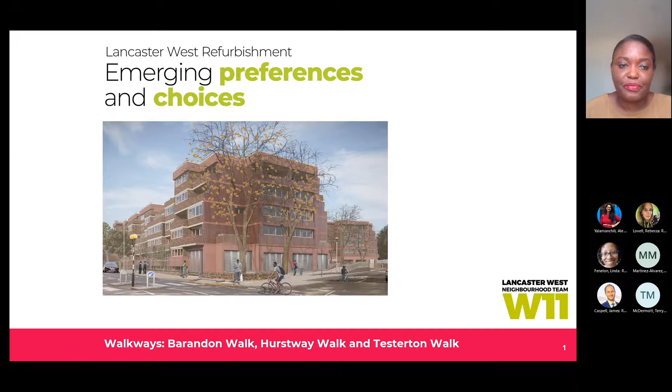I'm going to start off with a quick introduction of the Lancaster West team working on the external refurbishment of your blocks, that's the outside of the buildings and the communal spaces. Many of you will have met James Caspell, Lancaster West Estate Neighbourhood Director, and also here today is Andros Luizo, Head of Refurbishment Design and Delivery. Myself, Bunmi Shekoni, Senior Project Manager, Terry McDermott, M&E Project Manager, Maria Martinez, Refurbishment Project Support Officer, Aleke Yalamanchili, Assistant Project Manager, as well as Janet Hall, the Heat Network Engagement Manager.

In terms of the agenda, the meeting will last about an hour. I've done the introduction. James Caspell will give a brief introduction and an update on the refurbishment site-wide, as well as the Walkways co-design timeline. We'll run through the feedback from the initial design ideas phase and how that's informed the development of the technical design. We'll look at the improvement works to your homes, both the essential fire safety works and the thermal improvement works, which cover the sprinklers, the ventilation system, the windows, insulation strategies, as well as the lighting pilot and the main refurb pilot.

In addition to that, we'll be talking about the improvement works to the exterior of your blocks, the roofs, the AOV improvement works, the communal areas, the refuse and waste management strategy, and how we're going to be maximizing fire safety, looking at the fire strategy for the 3 blocks. We will conclude with next steps for the refurbishment and how you can fill out the Emerging Preferences and Choices survey for your feedback. So without further ado, I will hand over to Lancaster West Neighbourhood Director James Caspell.

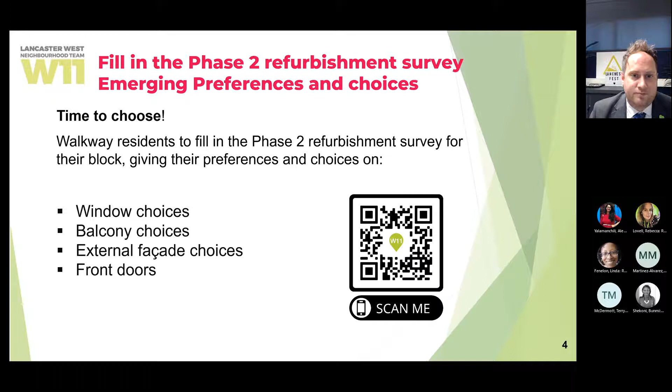In terms of the co-design timeline, it was last spring when we started the first phase, which was capturing the initial design ideas for refurbishment works. At that point, we'd secured grant funding from all levels of government to be able to deliver on the promise of a 21st century model estate. So we asked you for your views on things like different types of wall insulation, different types of glazing and ventilation. We've been working to process that feedback, looking at what is technically feasible and having specific engagement on issues like maximising fire safety and the roof works, which are due to commence in January 2023.

So we're now in the emerging preferences and choices phase. There'll be a range of events and drop-ins, including at the 411 Testerton Walk pilot, as well as our showroom at Unit 29 in Baseline Studios. Through October and November 2022, we're going to be speaking to as many people as we can to capture your views to shape your refurbishment. Next slide, please, Maria.

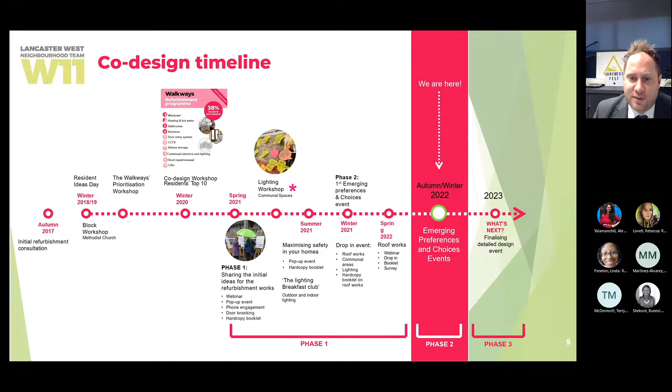In terms of the initial design ideas events that we held last year, you told us a number of things. Nearly 9 out of 10 residents supported triple glazing over any other form, and just over half of all residents prefer aluminium frames. Specifically, we had a lot of verbatim feedback that said people would like aluminium frames very similar to what we've got at the moment, the original Walkways windows, which are in most of the homes today.

But we are going to review that and give you the option to look at other choices as well. So we've used this feedback to decide the best window types available. We've installed them at 411, so you can come along and have a look and a feel in terms of different operating mechanisms and colours. We're aiming through the second phase to have over 50% of all households on the walkways take part in the co-design process. Next slide, please, Maria.

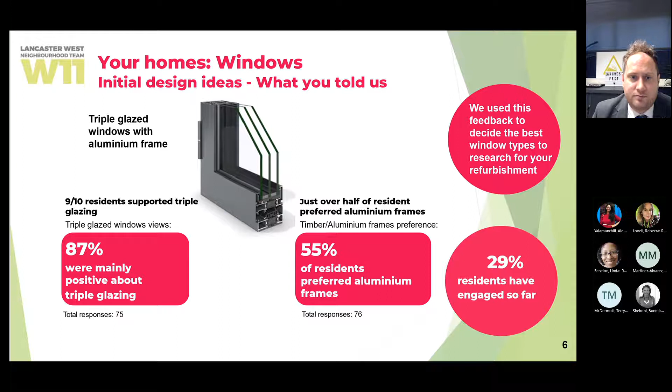So in terms of wall insulation, we presented to you last year options around external wall insulation and internal wall insulation, and since then we've started to explore and are currently confirming what will provide the maximum benefit in terms of energy performance, and at this time especially in terms of reducing your energy bills.

Residents did tell us that they preferred, if anything, external wall insulation. People were open to internal wall insulation, but we had feedback around not removing the footprint of your properties, which internal wall insulation tends to do since it takes up space in your home. Also, external wall insulation is often easier and more robust to fit in a way that lasts, and it gives us the opportunity to improve the visual and texture of the external facade.

What we're going to hear later on is some of the options that will be available, and you can come along to Unit 29 Baseline Studio Showroom to actually see and feel what some of those EWI options look like. We're continuing to look at the different types of insulation, but for now we're asking what your preferences are in terms of the colour and texture available, and whether you'd like to see a minimum or maximum amount, which we'll discuss a little later on.

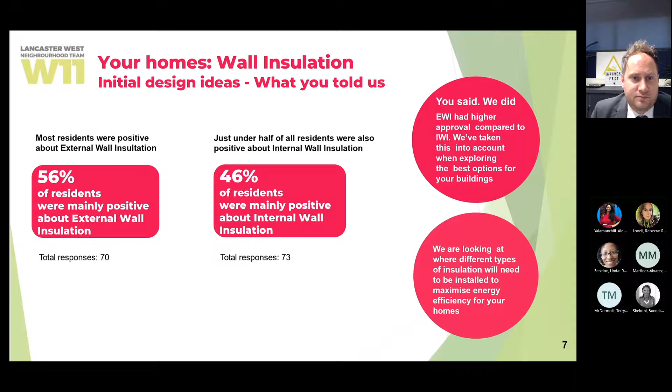At the Maximising Fire Safety drop-in event, which we held a few months ago, we talked about the options to install sprinklers into every home. It's a key part of our fire strategy to install sprinklers in every Walkways property. We're also ensuring that other work we do around external wall insulation and ventilation helps to improve safety in your home, and looking at A1 and A2 non-combustible materials wherever possible, well beyond building regulations.

With regards to sprinklers especially, 7 out of 10 residents were positive about having them installed, but we did have a number of concerns expressed about disruption to the home, impact on ceiling height and so on. So we're going to share with you some of the viable options which will mean those concerns will be mitigated.

Residents are also positive about replacing the windows facing into the atria, the communal spaces, with fire-resistant glazing, which will mean we can eventually do away with the fire curtains, which a lot of people gave us quite strong negative feedback against. We're going to share with you what the options are to improve that as well.

In terms of your communal spaces as well, in summer 2021 we asked what you liked about your communal spaces and what you disliked. People obviously like the wide walkways, the high ceilings, and a sense of privacy from the outside neighbourhood. But there are a lot of dislikes too, around cleanliness and colours, the way the stairwells are configured, the level of noise, security, and a range of other concerns.

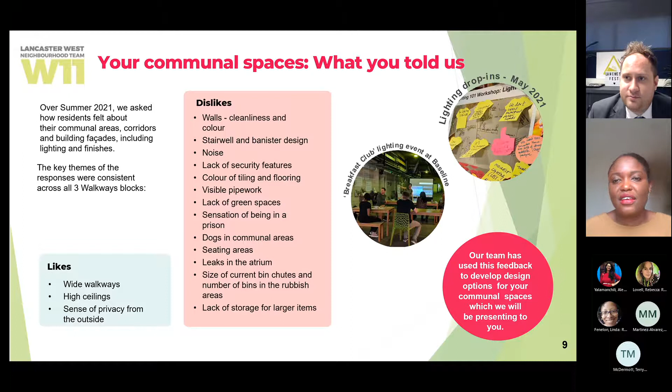We made the decision to accelerate the roof improvement works for the walkways due to funding timescale. The roof improvement works provide an opportunity to improve the look of your blocks, improve thermal performance, fire safety, and of course eliminate long-term issues with leaks and reduce maintenance needs.

The AOV leaks are an issue, particularly in Barandon Walk. The existing AOVs are beyond their usable life and are currently jammed open, and we all know what that means in terms of water coming in, particularly in the winter months.

Phase 2 engagement for the roof works was held in May of this year. Residents were invited to drop in at NKRC. We talked about the AOV and roof light frames, the colour, look and finish. We talked about parapet railings, the works to the terraces, which is the penultimate level, as well as the terrace screens which divide the terrace space, and the pergola structure and material.

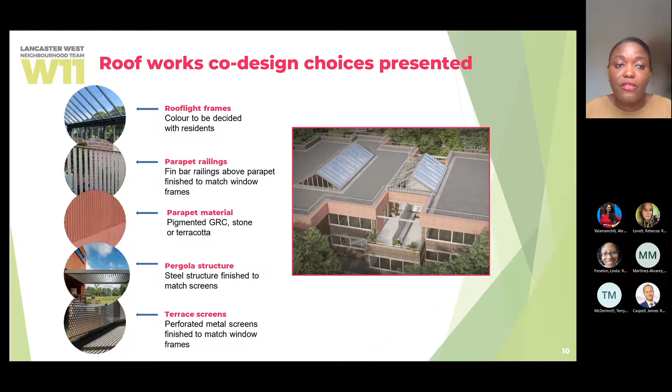So of the 283 eligible properties across all 3 blocks, 81 flats, which is 29% of flats, completed the survey for the roof works. And for the roof railing color, the majority of residents preferred dark grey.

The atrium roof light color, the majority preferred white, which is similar to what's currently there at the moment. For the atrium roof light gable glazing, the clear preference was clear glass as opposed to frosted glass, which provides a clear view of the sky from within the atrium space.

In addition to the thermal improvement of the roof deck and the replacement of the roof lights, the pergola structure and screen on all terraces will be replaced as part of the works. For the pergola, 3 options were presented, and the majority preferred a covered option to provide shelter from the rain and sun, which is quite nice if you're using your terrace space and sitting there enjoying a coffee.

3 options were also presented for the replacement screen, which divides the terrace space, and the majority of residents prefer the diagonal pattern option in a dark grey colour.

So we now have planning permission for the works. We've tendered the project. The tender return date is the 21st of October, which is today, the day of the presentation, and there will be a 2-week evaluation period, which will involve tender scoring with residents.

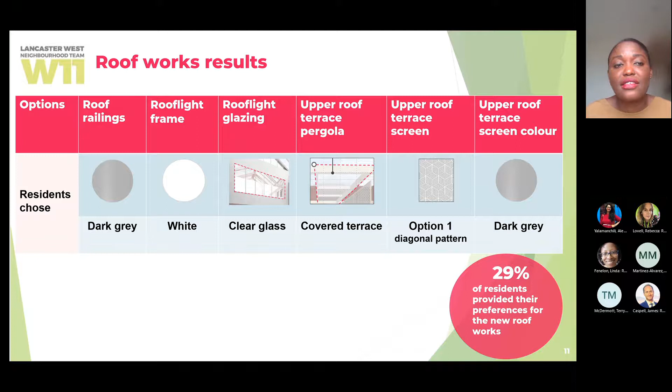Alongside improving fire safety of your homes, a key focus of the refurbishment design for your blocks has been retrofit measures to improve the thermal efficiency and energy performance.

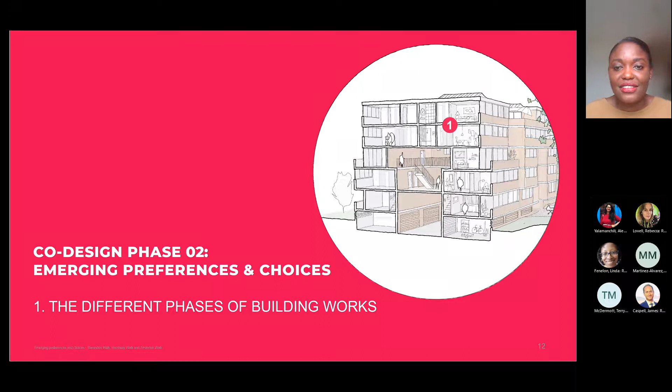Measures the design team have looked at include insulating the roofs, as mentioned earlier with the roof improvement works, and upgrading the roof lights, which will help reduce heat loss and heat gain. The systems under review all use A1 rated non-combustible insulation.

And as I said, it's been fast tracked. We've tendered. We're looking to start the works early next year for the roof works.

The other energy and thermal improvement measure we're looking at for the walkways is the replacement of windows and doors, changing these to airtight triple glazed frames, which offer significant thermal improvement. We know that the replacement of windows and doors is a priority for residents in the walkways, so that's top on our list as well.

There's also the upgrade works to the balcony decks with new drainage, insulation, and rainwater goods, which will reduce heat loss from the internal space below the balconies, and also help resolve the recurring balcony leaks.

Wall insulation is also a key part of the thermal improvement works, improving the thermal envelope either by insulating from within, the internal wall insulation James mentioned earlier, or by wrapping the exterior facades of the blocks with external wall insulation. James is going to go through this in more detail later on in the presentation.

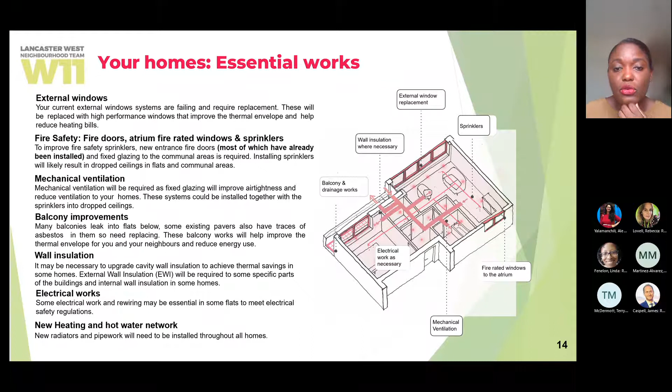In terms of the sprinklers, I mentioned earlier that sprinklers is obviously an essential fire safety work that needs to be carried out. And we've evaluated different ways of installing the sprinklers.

One piece of feedback from the recent fire safety engagement was that residents raised concerns about the dropped ceilings - some residents have tall furniture, so what does a dropped ceiling mean for tall furniture, and also pendant lights? So we've looked at a ceiling mounted option, which is recessed into the dropped ceiling with pipework behind it, and there's also a wall-mounted recessed option where the sprinkler is recessed into a boxing at high level in the rooms.

In terms of the pros and cons, let's look at the ceiling mounted first. For pros, we're going to have concealed fittings, which ensures a discreet and tidy finish, and the sprinklers are located in the center of the room, which maximizes the spread of water if activated - that's better from a fire safety point of view, with good reach to all parts of the room and less open to obstruction.

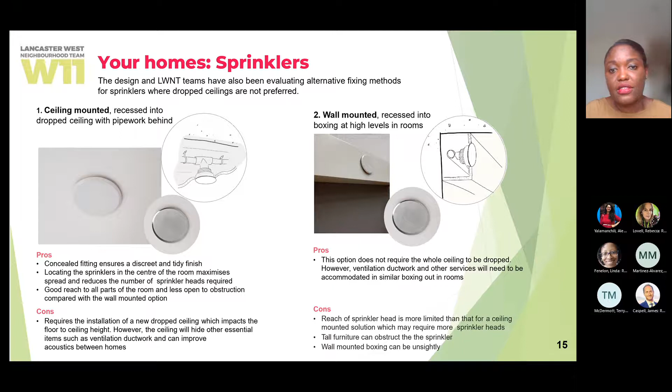I will now hand over to Terry, M&E project manager, who's going to present the mechanical ventilation systems we've explored and how they could be installed in your flats. Thanks, Fumi. So new ceilings in your homes has obviously been a question that everyone's asked about.

As a minimum, the drop ceiling will generally need to be dropped 117.5 millimetres to accommodate sprinklers, lighting and MVHRs. We're looking to minimise the depth of the drop ceiling to ensure the ceiling height remains as generous as possible, and are trialling options in the pilots at Testerton, where we're going to be doing an open day very shortly - so please come down and have a look for yourself.

Additional space will be needed depending on the chosen ventilation - MVHR, ducting and cooling. The following are minimum guides for MVHR. We've done three types on the pilots, shown in the pictures below: plastic ductwork is 137.5 millimetres, metal ductwork - which is our preference because it's fire rated higher than plastic - and MVHR with future proofing for cooling, which requires a deeper depth of 147.5 millimetres.

Both plastic and metal ductwork are safe, however metal ductwork has an additional fire safety benefit as it's an A1 rated non-combustible material. Can you move to the next slide, please, Maria?

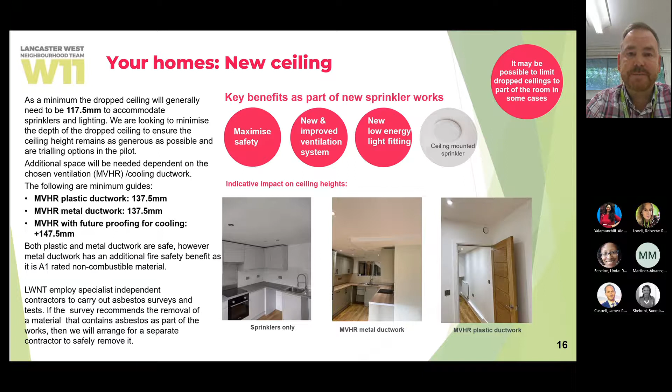So your home's combating overheating. This is where we've engaged and listened to you guys. We know that many of your homes overheat, and we are looking at ways to address this issue. We've monitored a selection of homes throughout the summer, and we are also using computer software tools to develop solutions.

There are a number of ways we can reduce overheating: reducing solar gain by replacing the windows with glass which is high efficiency and reflective. We've also improved the ventilation, which follows into the MVHRs. The design of the new windows aims to maximise natural ventilation in a safe and secure way. The new mechanical ventilation systems will also help by improving the ventilation of homes, as well as bringing fresh air inside.

Adding insulation to walls and roof means heat gains from outside can be reduced. Replacing the existing heating pipework with new insulated pipes will also help to reduce internal heat gains in warm weather. Adding cooling - this is adding mechanical cooling with the MVHR units, which can be added to some of the worst affected homes. As we're installing these, we are future-proofing the mechanical ventilation so that we can add the cooling later on down the line, which is definitely a positive for the estate.

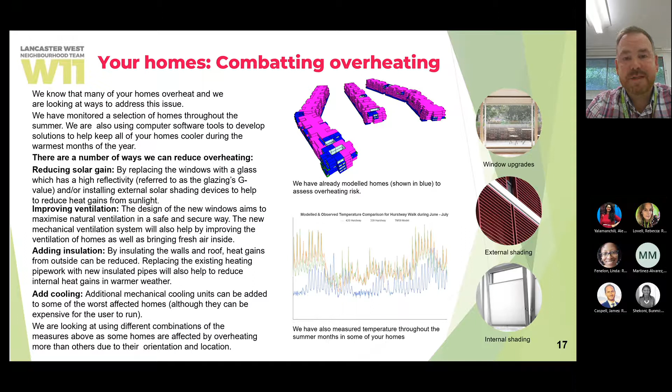So ventilation - keeping your home well ventilated is important to keep the air in your home fresh and healthy by reducing indoor air pollution. The key benefit of the MVHR system is that it recovers heat from stale air from your kitchen and bathroom before it's extracted. This means MVHRs can reduce your fuel bills because it's more efficient.

However, the MVHR kit is larger, which will impact storage space. It also requires ceiling vents in all rooms. In the smaller properties, the 1-bedrooms, we have been able to install the MVHR in the ceilings, so there's less impact. In the larger properties, they would require a store cupboard to go in, but they are hidden and not on show.

So just the pros and cons of MVHR, mechanical ventilation with heat recovery. The pros: it reduces the cost of heating as the kit recovers heat from extracted stale air, improves internal air quality, and reduces pollution by filtering incoming air.

Cons: the kit reduces internal storage space as I've said, and requires regular maintenance - changing the filters. The filters need to be changed twice a year and also cleaned every 3 months, but it's very easy to do. MEV, mechanical extract ventilation, is another pilot that we've done.

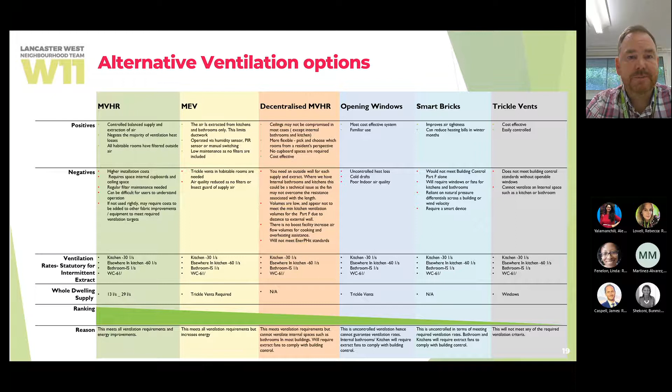Can you move to the next slide, please, Marion? So your home's ventilation - as we've discussed, the MVHR, also MEV and extract fans. As you can see on this slide, the savings across the whole year would be around £240 on your bills for electricity and heating. Obviously, with the current climate, with the electricity and gas issues, that will change over the coming years. But the MVHR will definitely improve the situation for you.

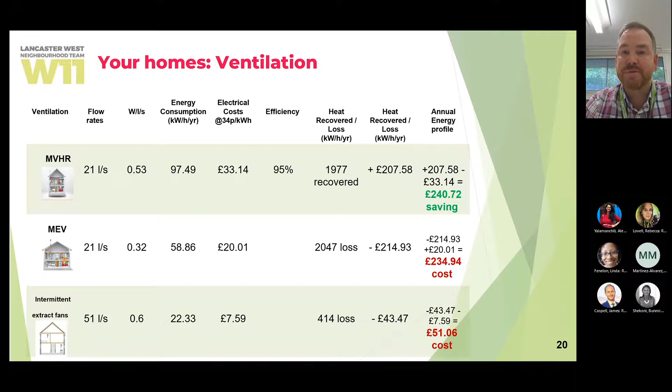Maria, can you move on to the next slide, please? So here's a diagram of the ventilation and the likely locations. We've used the Brink Flair 325 option and the Zehnder Comfoair as well, which are the top models on the market at the moment, and provide the best situations for ourselves and the properties we've got.

The MVHR ventilation machine will need to be located within an existing storage cupboard, like we've said, which means it will reduce overall storage space within your home. Again, that's not on show, but it is tucked away, depending on the size of the unit. Above is the example of MVHR in the Testerton pilot marked in blue. As you can see, it's in one of the storage cupboards - nice and tidy and tucked away. Thank you very much.

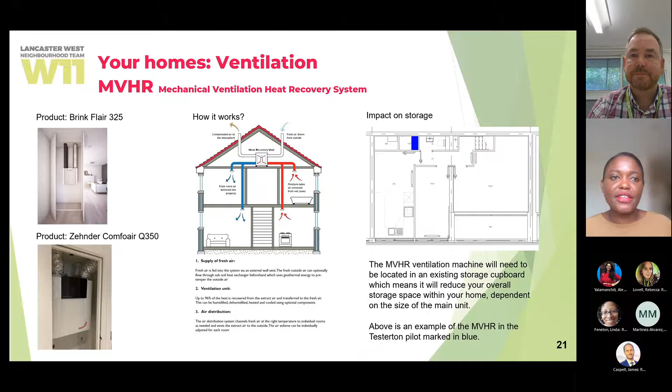So in terms of the windows, we've looked at different options. We've looked at aluminium windows, we've looked at composite windows, following feedback from phase one. We've explored different opening mechanisms: outward opening, inward opening, tilt and turn, slide in, and the different preferences indicated by residents' feedback in phase one.

Obviously, the starting point was the thermal performance, the U value. The lower the U value, the better. So looking at all the different options here, we've got Ideal Combi Velfac for outward opening windows, and then there's Ideal Combi Futura Plus 1 Velfac, as well as Schueco sliding doors.

So yes, in terms of U value, the inward opening tilt and turn Ideal Combi is probably the best, has the best thermal performance, followed by the Velfac 200E outward opening, and then followed by the Futura Plus outward opening.

We've also looked at secure by design. A window is secured by design certified if it meets rigorous standards of enhanced security performance as defined by the police. So obviously, our preference would be to install windows that meet that requirement.

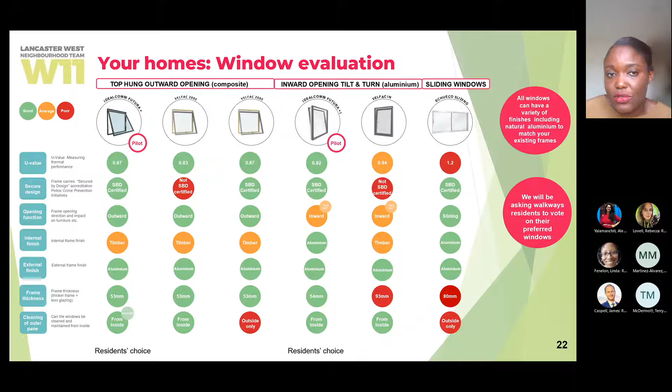So these are the two options. They both have great thermal performance, a low U value, 0.87 and 0.82. They're both secured by design. One is an outward opening reversible window, the other is an inward opening tilt and turn window.

One is fully aluminium, inside and out. The outward opening window, the Ideal Combi, is timber on the inside and aluminium on the outside. They're quite slim and very similar to the existing frame. In fact, we've piloted these windows in Phase 1 testing, so if you'd like to view and test them, we'll be inviting you to come and see the windows.

Both windows can be cleaned by residents from the inside of their flats. We'll be writing to you. I think a letter's already gone out to residents inviting you to 411, and there's also a video invite on the Instagram page.

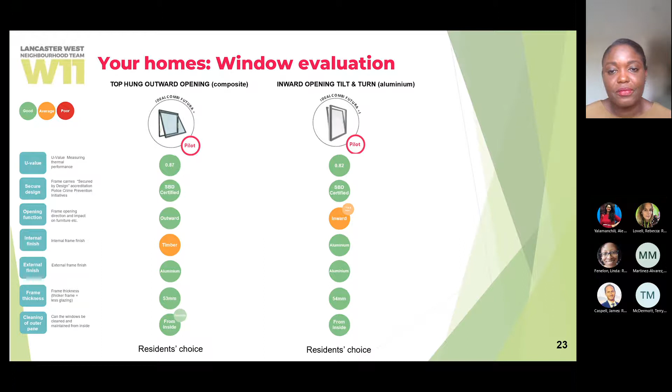Similar to the windows, we've looked at different options for the doors. We've looked at an aluminium framed system, and we've looked at composite, following feedback from phase one. We've looked at the thermal performance, secured by design, and the internal and external finish.

We've piloted the Velfac 200E, the second sliding door on the slide, in Phase 1 testing, so residents can come and view and test it. It's not as great as the Ideal Combi frame when it comes to thermal performance, the U value. Both Ideal Combi and Velfac are secured by design. We are not really looking at Schueco and the Rayner's options, because the thermal performance is not great at all—the U values are quite high, average to poor.

In terms of internal finish, similar to the windows, because the Idealcombi and Velfac are both composite frames, the internal material will be timber and the external will be aluminium. The frame thickness for the Idealcombi option is 79 mil, which is quite thick. The Velfac sliding door is 53 mil thick, similar to the existing sliding doors.

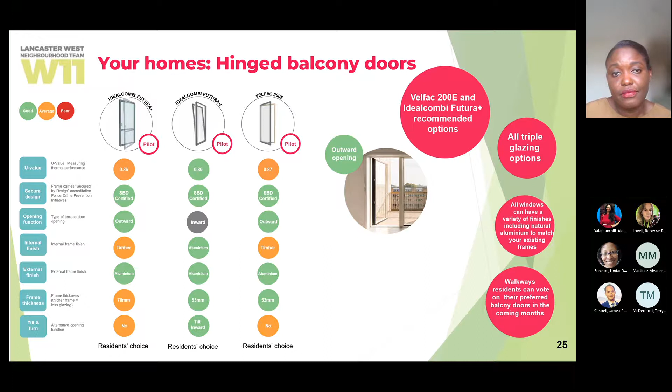In terms of the colors and the frame and window finish, the external paint finish options we're looking at - I think most residents have said they would prefer a color similar to the existing one externally. We've looked at anodized aluminium, basalt gray RAL 7012, and signal gray, which is a light gray RAL color. We've piloted all three in 411, so please come and see the windows and tell us what you think.

For the tilt and turn window, because this is an aluminium frame window internally and externally, it's possible to have an anodized internal finish, or it can be painted in any RAL color. We would recommend RAL white, RAL 9010, as well as dark gray, basalt gray, and signal gray. These are the colors that are possible.

We'll be asking you to tell us what you think, and this is part of the survey. Next slide, please.

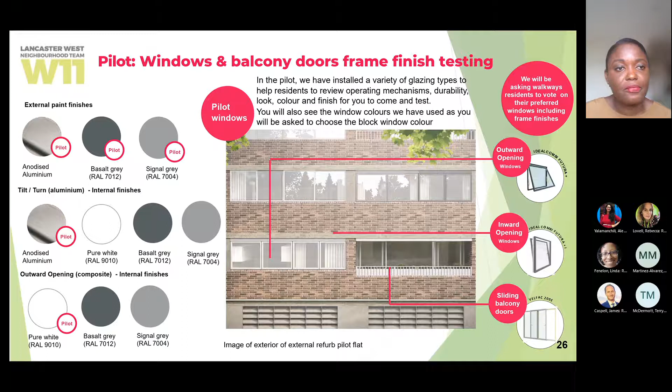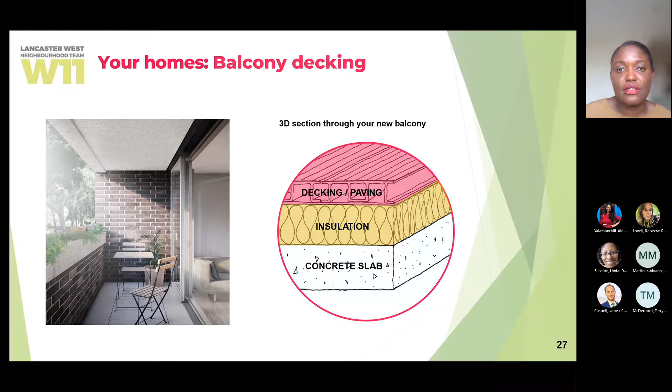For the balcony floor insulation, we've looked at glass foam options and mineral wool insulation. The glass foam options, the first two, are rigid, non-combustible insulation made from recycled glass and silica, while the mineral wool insulation is flexible, soft, and made from spun rock fiber. We've assessed all four options, looking at thermal performance, fire rating, and required fall - some systems would need to be sloped to allow water runoff, which reduces the space available for insulation. We've also looked at cost and the structural capacity of each product.

All four have the same U value. In terms of fire rating, the RadMat option is the best, as both the insulation and the facing are A1 fire rated. The remaining three are also A1 for the actual insulation, but the facing is E rated material. The RadMat system does not need to be sloped and therefore has a zero fall, although it's more expensive compared to the other options.

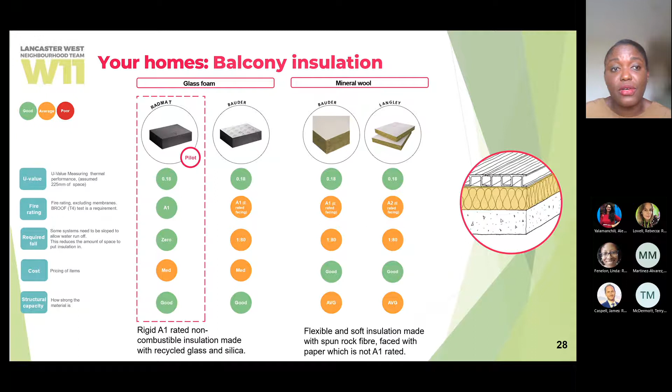In terms of the finishes, there are two main options: aluminium decking or pavers. The finishing will go on top of the insulation I mentioned earlier, as well as the waterproofing. The pavers can be installed either on a framed system or on pedestals. The installation method for the paver impacts the overall depth of the build-up of the balcony material.

Both pedestal and frame systems create an open system with a 2 to 5 millimeter gap between the pavers. Both systems are A1 or A2 rated - the frame system is A2 rated and the paver is A1 rated. But the paver finish is durable. Although it has a limited number of colors and textures, if we're thinking long term, it's really durable compared to the aluminium decking.

There are benefits to the aluminium decking in the sense that it has a smaller build-up, which is 53 mil. It is A1 rated, and it also has a closed system, so there are no gaps between each aluminium deck strip. For that reason, it's the recommended option.

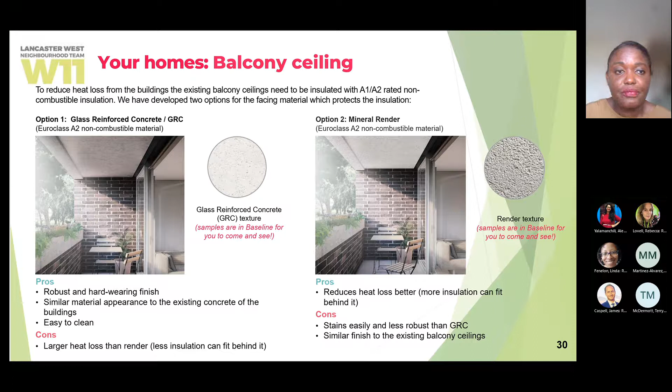We've also installed a new MVHR mechanical ventilation system, which Terry presented earlier. The balcony improvement works include the new insulation to the soffit, the new aluminium decking, as well as new railings and planters - that's also been installed. We've also installed internal wall insulation, which is great, and carried out a number of acoustic improvements. Residents will be invited to come view and test all the measures we've installed, and provide feedback.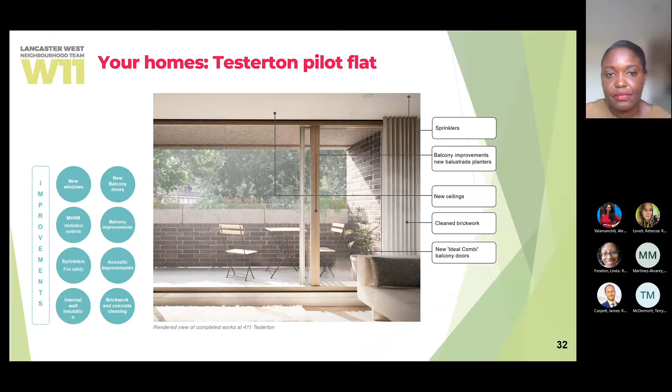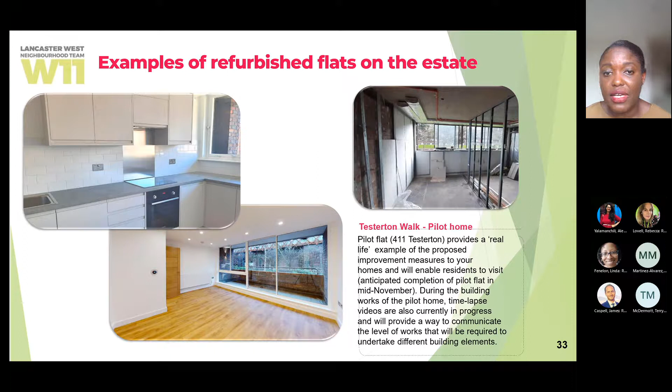These are just images, real life examples of proposed improvement measures, photos of completed void flats at Lancaster West. We'll be inviting you to come and see the flats, I think in November, so we'll be writing to you.

So I will now hand over to James, who will be presenting the insulation strategy for your blocks.

Thank you, Bunmi. Some really exciting design options emerging there. I'll set the scene in terms of the external wall insulation and indeed an insulation strategy for the blocks, starting with an explanation of why this is particularly complicated for the 3 walkways compared to the other blocks that we manage on the estate.

It's essentially to do with what's called the form factor of the building. Rather than one square or rectangular facade, we have a number of protruding and recessed balconies and facades to your individual homes, which creates a greater surface area for heat to escape. There are also implications when installing external wall insulation around your windows and balcony doors, and in terms of the logistics of ensuring the EWI system can be installed safely so it lasts the 20 or 30 years we intend.

As we recapped earlier in the webinar, residents were slightly more in favour of external wall insulation than internal wall insulation, so we've been focusing on what we need to install. I'm going to talk about a minimum approach to external wall insulation and a maximum approach as well.

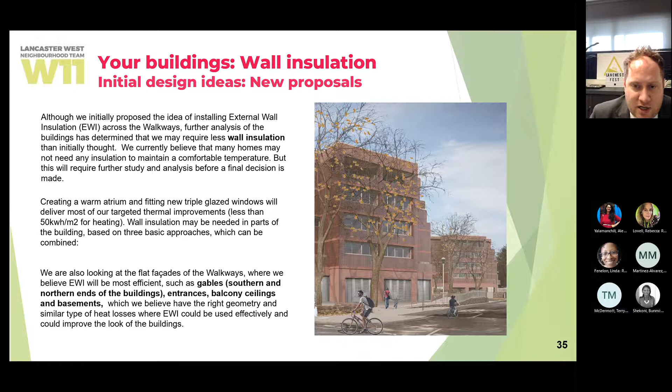So let's move on to the next slide. I'll start to talk about some of the intricacies, to explain the complexity in a little bit more detail.

Likelihood is this will happen in early spring 2023. Next slide, please, Maria.

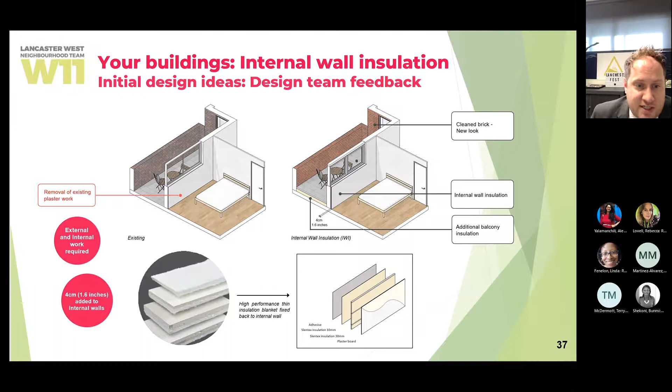So what does that mean? We've identified there is a need for what we call a minimum external wall insulation approach, and I'll go into detail in a moment about where that would apply. What that does is substantially reduce the current heat demand, meaning more comfortable homes and substantially lower energy bills, which is something all of us are increasingly concerned about.

Based on the examples I've just given, it's highly unlikely it would be technically feasible to get anywhere near 100% coverage from an external wall insulation system. That's not to say that if residents strongly wanted to change the entire character of the building we couldn't do so, but it would mean we wouldn't be relying on external wall insulation to do it. In the same way Bunmi's just set out the use of A1, A2 non-combustible insulation in the balconies, you're getting a build-up there.

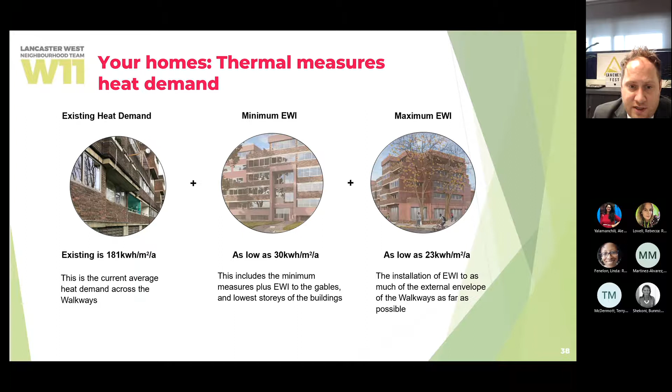If we move on to the next slide, please, Maria, we detail a bit more visually the differences we're looking at. On the left you can see the existing heat demand. The measure there is 181 kilowatt hours per metre squared per year. That's the primary heat energy needed to keep the property warm. So that outer large circle is the existing heat demand in terms of what you're all living in at the moment.

A minimum approach to external wall insulation would be about 30%, and I'll show you in a moment which parts of the building we would need to apply that to. It substantially reduces that already, meaning lower heating bills, and it means we're well within the target heat demand of 50 kilowatt hours, which is a social housing decarbonisation fund target we're looking to reach.

That said, if we were to look at maximising the use of external wall insulation and potentially providing that new facade, we think it would be between 50 and 75% of the building. Certainly in around 3 months' time we should be in a place to show you exactly what that would look like in a bit more detail.

Other than the change to the aesthetic of the building, that would also mean even further reduction in heating bills. The difference is nowhere near the difference between existing heat demand and that minimum approach, but it does maximise the benefit and opportunity to ensure heat demand is as low as it can be, keeping your bills as low as possible. It also means the most dramatic and potentially most positive impact from an aesthetic point of view on the outside character of your building, which we're going to talk about in a moment. Next slide, please, Maria.

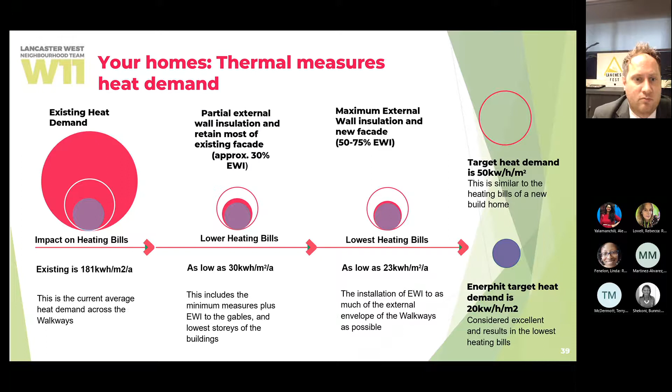So, in terms of what external wall insulation might look like, we're showing both ends of the walkway, from the Grenfell Walk entrance on the right-hand side, and from the southern angle, where there currently isn't an entrance, but to give you a view of what we call the gable ends of your blocks. Both ends of the blocks are definitely areas of substantial heat loss, so even in the minimum programme, we would be looking to install external wall insulation.

You can see it dramatically changes the current view of the building, makes a real statement, and crucially will substantially reduce the heat loss currently coming out for those living at the end of both walkways. So the northern and southern ends of the building are something, whether the minimum or maximum option is chosen, we would be looking to install external wall insulation.

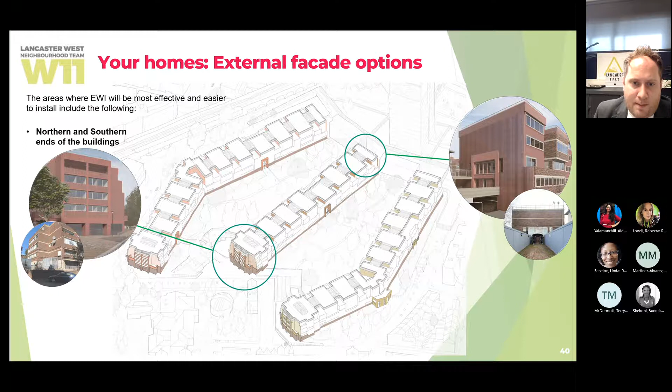Secondly, we have the entrances, sometimes referred to as the courtyard and street entrances, which is where you come in and out of your homes. Again, these are an area of substantial heat loss. We've had a lot of feedback from residents - they don't particularly like the look and feel of the entrances, and feedback that when visitors come, it doesn't set the best impression in terms of the homes, which are largely absolutely spectacular homes that many residents have shaped themselves, delivered through the co-design internal refurbishment.

So what does this mean in terms of wall insulation? We will be looking at double and triple glazing to those entrances, and high quality external wall insulation to minimise heat loss. You can see the potential difference, particularly bottom right - the new entrance that could be installed at Bramley Road there to Hurstway 400s, by the bus stop currently. So we've got opportunities to really transform the entrances to the building, and ensure fire safety and energy performance are at the heart of that. These proposals, through the minimum or maximum approach to external wall insulation, we would be looking to finalise.

So for those living at the top of the building, we've already heard from Bunmi about the roof works today and previously. We've obviously got the issue of the external facing walls on your terraces, and indeed the parapet of the roof itself. That's something we'd ensure complements the broader strategy, but we definitely are going to need some form of external wall insulation at that level. What we're looking to hear from you is the textures, the look and feel, and the colour schemes you'd like us to consider. The parapets are also in scope for both options.

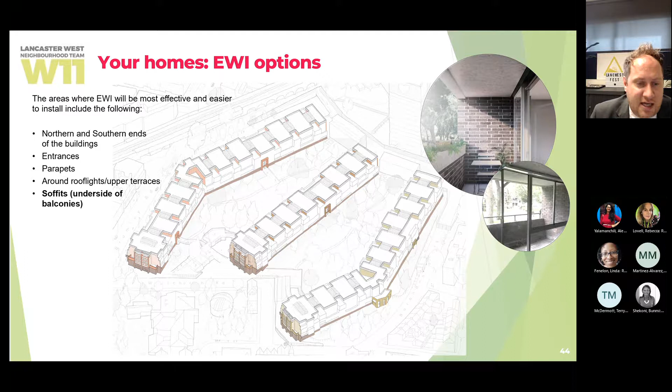So the soffits, as Bunmi's talked about already, are the underside of your balconies. For those that have one, this is obviously the floor of the property above, broadly speaking, or in some cases there are balconies upon balconies. On the walkways, the way it's been designed, we have a lot of balconies where essentially you're underneath someone's floor - that's another area of heat loss. So we'd be looking at installing external wall insulation there as well, and that may well be to a different colour scheme than the actual vertical facades of the building, which we'll show you in a moment.

Another area where it's highly likely we'll be installing external wall insulation is for those in maisonettes that go down as you enter them, split level maisonettes above garages or above Baseline Studios for those in Barandon Walk. We're almost certainly looking at installing external wall insulation there. Substantial heat loss for those properties is coming from there, particularly the cold spaces in terms of the garages under Hurstway and Testerton Walk.

Next slide, please, Maria.

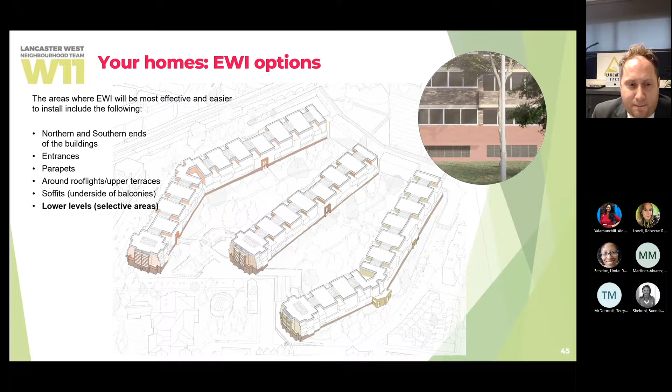A view here in more detail of the difference between retaining the existing facade, perhaps cleaning up the brickwork or the concrete slab, compared with what it could look like to transform the external facade using the gable ends. It doesn't mean we'd have the same textures, or that we necessarily have to use glass reinforced cement, concrete, brick facades, or renders. There are a range of different options.

So what we're looking for you to do today is tell us whether you would like a minimum approach to an external wall system or a maximum approach. We'll also ask about colour schemes and textures you'd like us to consider for the final designs. In phase 2 we're not asking you to pick the final design, but we've produced these images to help residents understand the opportunity, visually and in terms of improving energy performance.

Next slide, please, Maria.

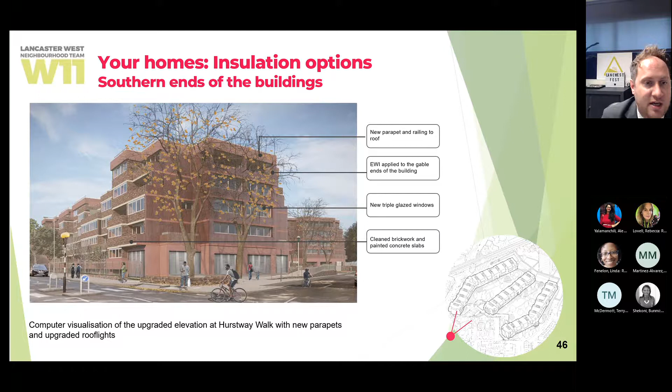A larger picture of what it could look like, highlighting in a buff pink colour the areas where we would be looking to install external wall insulation. We're also currently looking at some of those protruding areas, and what it could look like to install an external wall insulation system there.

There is the opportunity, if residents want to keep the brick heritage of the building as has been the case on other blocks on the estate, to install brick facades alongside the GRC rendered elements of the EWI system. If you come along to Unit 29 of Baseline Studios, you'll be able to see what that looks like - they look identical to bricks, but give the opportunity to freshen up the look, without impacting the sizes of windows, particularly for elements of people's homes that protrude out.

In terms of the recessed balconies and households, these are areas where we need to consider that installing external wall insulation into those flank walls going towards the recesses would have a negative impact, in that the size of your windows would reduce very slightly.

Next slide, please, Maria.

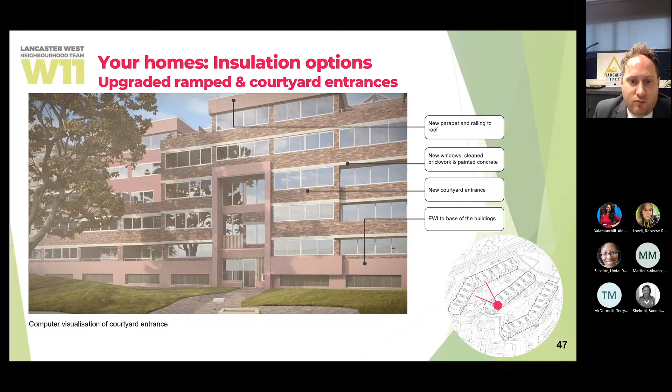A zoomed in picture of the Grenfell Walk approach, the ramped entrances, showing the opportunity there. You can see we've highlighted areas where we could potentially install external wall insulation on the ends, and we've started to play around with what that might look like in terms of changing the character and facade of the building.

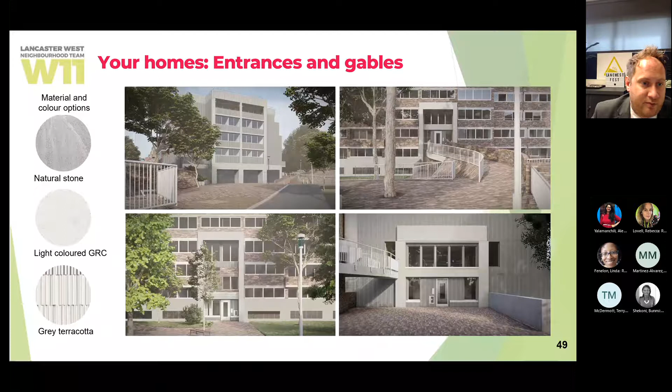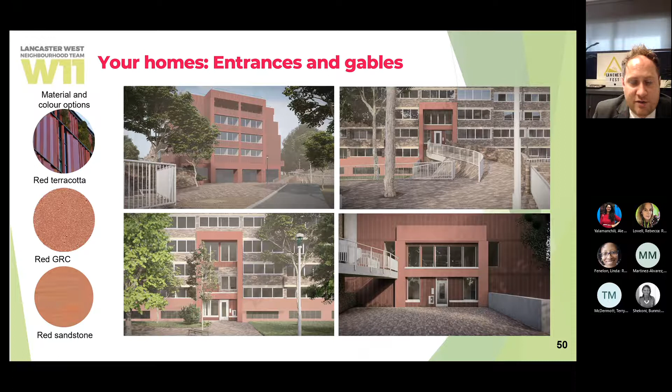Similarly, here are the red swatches - red terracotta and sandstone approaches, probably closest to some of the existing elements and brickwork Bunmi alluded to in terms of the balcony. We'll be asking you to give a preference on whether you like this particular colour scheme or not.

Next slide, please, Maria.

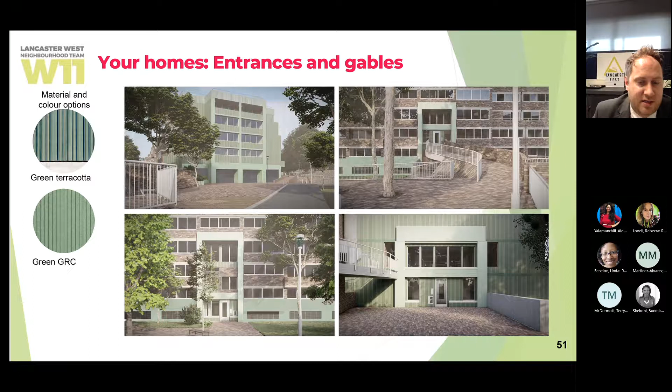So if you come along to the showroom, you'll be able to see firsthand the different colours and textures that are available, and we'll be asking residents to rank these 3 swatches in order. You'll be able to provide verbatim feedback as well. So if people say, no, I want it to look almost exactly as it does now, that's something you can tell us. We just want to use this as an opportunity to get a steer, because it means we can move much more quickly to making a final decision if we broadly know what residents would like to see, in this case, in terms of colours.

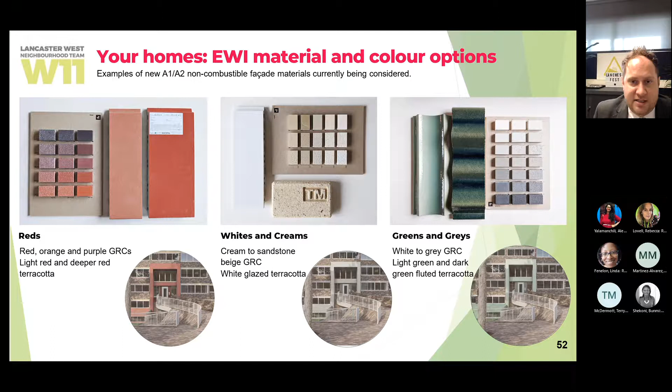And the next slide, please, Maria. Now in terms of texture - these are pictures of some bespoke samples that we've had put together especially for Walkways residents to come along and look at and touch. You're more than welcome to come along to Unit 29 any time between 10 and 4 o'clock and have a look firsthand at what some of these textures might look like. But I do want to express that these textures would be absolutely accents to the overall system, so it isn't the case that you would have an entire wall with these textures and colours, but in terms of accentuating points like the entrances and the parapet, if you would like a certain aesthetic, there's every opportunity to transform or enhance the existing Walkways appearance.

And we're really looking forward to hearing your views when you fill in the survey.

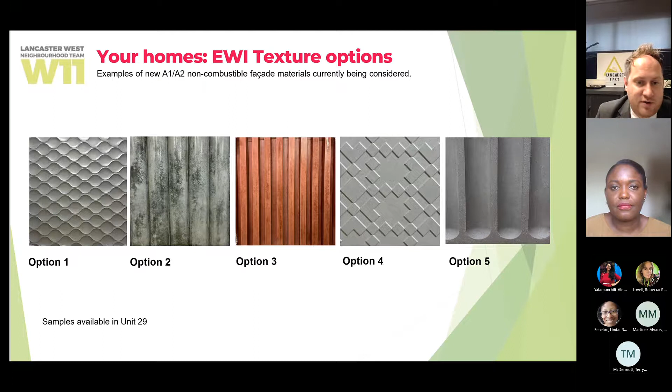Thanks, James. We are now going to look at the proposed works to the common areas of your blocks. Next slide, please.

So each walkway block has a long central communal space running the length of each building, highlighted in the diagram in yellow. Currently this space is semi-external - rain and wind does not enter, but warm air can escape easily. So to keep the space warm, the proposal is to fully enclose it, so that it's treated as an internal space. This is similar to how a corridor in a typical apartment building is enveloped by the homes around it. But it wouldn't need to be heated, as it will be passively heated through upgrades to the thermal fabric, such as replacement of the existing roof lights and new entrances.

The roof lights and entrances will be designed to keep the heat in during the winter. In summer, the roof lights will automatically open to naturally ventilate the communal space if it becomes too hot, or if it detects smoke. So the benefit of enclosing the communal space is that we do not need to insulate the walls of your homes that face into this space. This means noise and disruption from installing the insulation is minimized, although works will be required to upgrade the roof lights and install new services within the space.

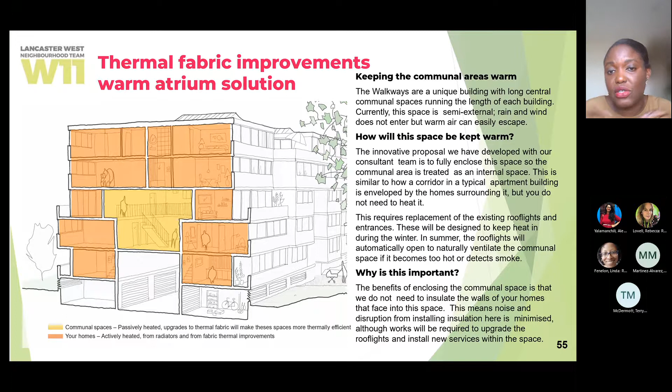Next slide, please. In hot weather, the communal space will be passively ventilated through the new vents at entrances and roof lights, as I mentioned earlier. The cross ventilation which currently happens through flats - you have the windows that face onto the courtyard spaces, and then there's the atrium windows that face the communal space - that cross ventilation would no longer be possible, as the atrium windows will not be openable due to fire safety reasons. They're going to be replaced with fixed fire rated glazing.

And this is where the new mechanical ventilation Terry mentioned earlier comes in. The ventilation of your flats will be achieved through natural ventilation through open windows, as well as mechanical ventilation through the installed new ventilation system, which could be mechanical extract ventilation or the MVHR system. Next slide, please.

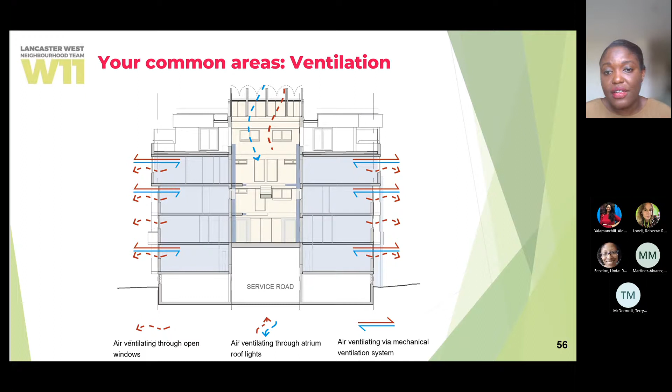So the design and look of the common areas currently have kind of an institutional appearance, and the material finishes palette is dated and has this industrial lighting, which further emphasizes this. With residents' input, there is an opportunity to transform the appearance of the common areas through upgrade of material finishes to walls, floors, and railings. There's an opportunity to install new, modern, energy efficient lighting. The proposed strategy for new materials in the common areas is to achieve a clean, lively, and uncluttered appearance. Existing high quality and robust materials will be reused where possible, and new materials will be introduced which match this durability and quality.

So we are going to be piloting this improvement work to the communal space in Testerton Walk, which Alekia will now talk through. So I'll now hand over to Alekia to run through the Testerton Walk communal upgrade and lighting pilot. Alekia.

So we will be undertaking some improvements to the communal areas, as Bunmi mentioned. Over the coming months, we aim to trial this first in the south end of Testerton Walk. Would you mind going back to the previous slide, please, Maria?

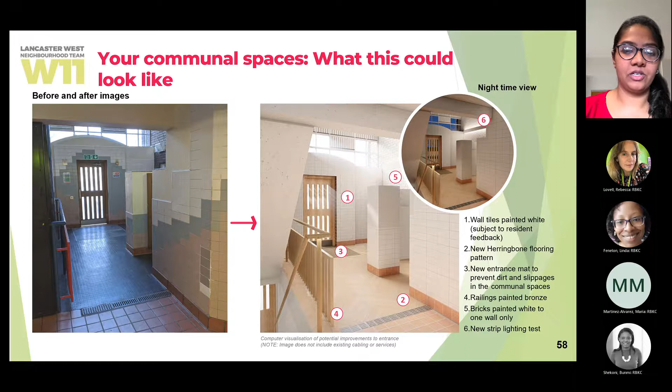Good quality lighting and well-designed lighting fixtures always improve the sense of a space and also resident well-being. Energy saving is also a top priority for us at Lancaster West. So all the new lighting we replace it with will be LED lights, which use a minimal amount of energy to run, and will have the option to be dimmed and turned off when not in use, which also saves energy.

As you can see in the picture there, the left picture shows how it currently looks at the entrance in Testerton Walk, while the image on the right is showing the new lighting we are planning to trial, which is called up and down lighting, as part of this.

These lights create a welcoming atmosphere and also improve the perception of safety. The up and down lighting will have an LED warm white light at the entrance that can also be dimmed and turned off, creating a soft glow which highlights the wall features. The same kind of lights will also be used for highlighting the floor and the ceiling. Can we go to the next slide, please, Maria?

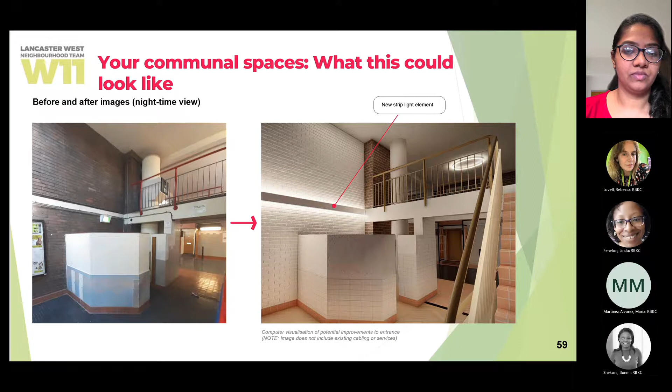This is a design proposal to upgrade the spaces beneath the skylights. This new lighting is specifically designed keeping the communals in mind. The big bulky lights that currently exist will be removed and replaced with chandeliers, creating an elegant look and giving soft lighting effects to the communal areas. The chandeliers will be of different sizes and suspended from different heights to create a welcoming design, giving the impression of a bright lit space while not being limited to glaring light. Can you go to the next slide, please, Maria?

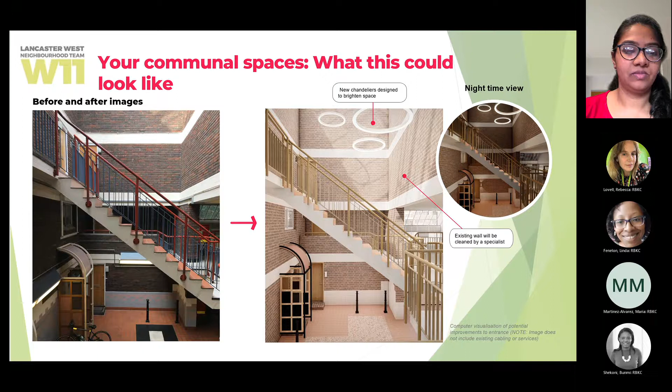This pilot will allow us to test new flooring in the walkway areas, divided into broadly 3 main types. As mentioned earlier, the existing terracotta flooring will be deep cleaned using a specialist cleaner, giving a brighter look. The existing lino entrance mat and flooring will be replaced, and we have explored various options to trial new flooring. One option is vinyl flooring, which gives a wood effect, laid in a herringbone pattern.

So the advantage of having this flooring is it is made out of 100% renewable electrical energy, which makes it an energy efficient material. Wherever the skylights are present in the walkways, this is where the bright light from the outside will be entering into the walkways.

So we think it's a really good idea to trial the new vinyl flooring, which is patterned. That will create an alluring look to the walkways. And this material is also going to be made out of 100% renewable electrical energy, again making it an energy efficient material. It also helps reduce noise in the communal areas because it is a noise absorbing material.

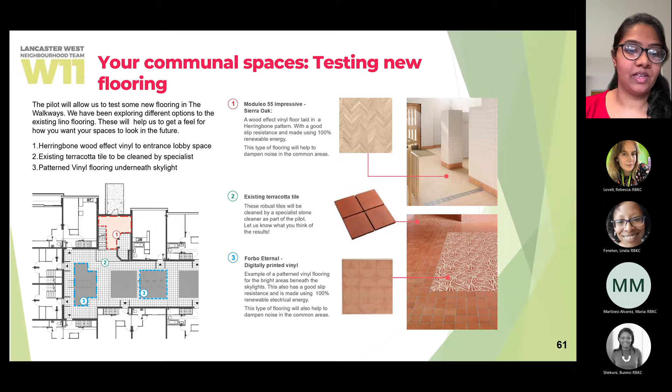As part of the upgrade works, we are also constructing a new service riser in the walkways. This will be a temporary mock-up of a new service riser. This service riser cupboard will contain all the essential service cables, such as the heating, hot water, electrical cables, drinking water, internet, phone, etc. This basically creates a clean look and will tidy everything because it all fits into a neat compartment, and it will also prevent any exposed services to the outside.

As the existing services are older and will need replacement, when it's time to upgrade, this will also provide easy access to all the services in one cupboard. The service riser cupboard will be located at each light well across the walkways. This will also be painted in a white and bright color that helps in reflecting the light coming from the skylights above, which also adds brightness to the communal areas.

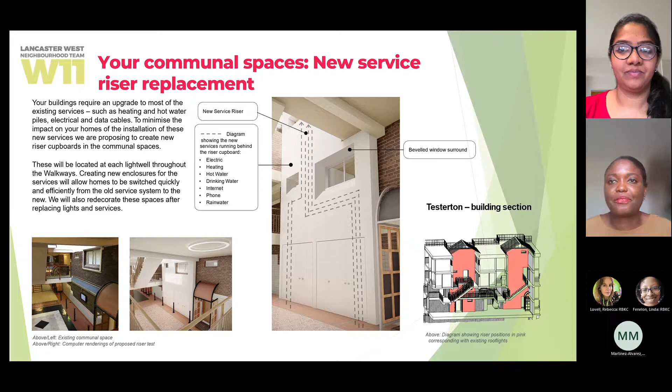So we're now going to look at refuse and waste management strategy for the walkways.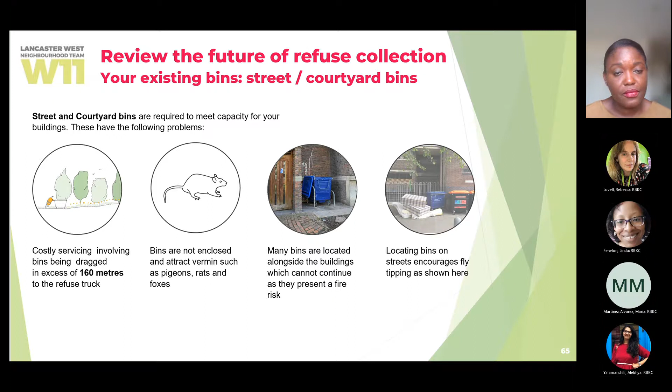So we've been looking at the future of refuse collection and what options we have. There is an option to keep the existing internal bin chutes and improve them, or replace them with a new bin chute system. The pros of that is it retains the current travel distance - you can come out of your flat, go to this bin chute and dispose of the waste.

But obviously the cons of that are the maintenance costs - should anything happen, maybe there's a fire safety issue - and there's inadequate separation of refuse and recycling, as I mentioned earlier, and vermin and pests within blocks. There's also the fly tipping issue, because if we keep the existing bin chutes and the same number of bin chutes, we will need to keep the courtyard bins as well as the street bins, which presents issues with fly tipping and fire safety.

There is another option to introduce new custom built dedicated courtyard bin enclosures within the courtyard spaces. The benefits of that are improved fire safety - those new enclosures will be secured and would ensure the enclosures are built of non-combustible materials, and there will be dedicated refuse and recycling bins.

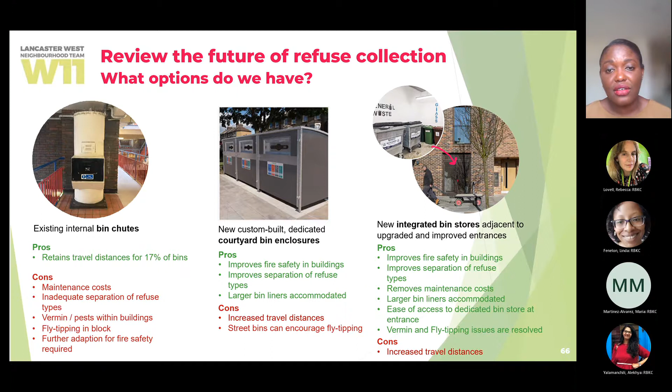So on the refuse strategy I just presented, in the survey we're going to be asking about your thoughts on the future of refuse collection. It would be good to hear your thoughts on whether we should keep the existing bin chutes and improve them, or replace them and introduce new refuse stores, new dedicated bins within the courtyards.

So moving on to maximizing fire safety.

Going through the fire safety strategy for the 3 blocks, the Walkways blocks, what we showed you last time in phase 1 - we've always said fire safety is an essential element of the refurbishment works. To improve the fire safety of your blocks, we are going to be replacing the roof lights with integrated, automatically opening vents to allow smoke to escape easily in the case of a fire.

We will need to install sprinklers in all homes. There are so many benefits to sprinklers for everyone's safety and protection. All homes will need to have sprinklers.

The sprinklers in homes also ensure that the communal areas are always safe to move through if people are escaping, traveling from a fire or an affected flat. The sprinkler heads will only activate if that particular head is exposed to a real fire, so there won't be any false alarms or false activation.

The other fire safety measure we're looking at is installing smoke detectors in all homes and common areas. We've already started doing this as part of the void internal refurb work we're doing. We will be replacing private entrance doors - this has already started. And we'll be adding new insulation that is only A1, A2 rated, which is the lowest risk material rating under fire regulation.

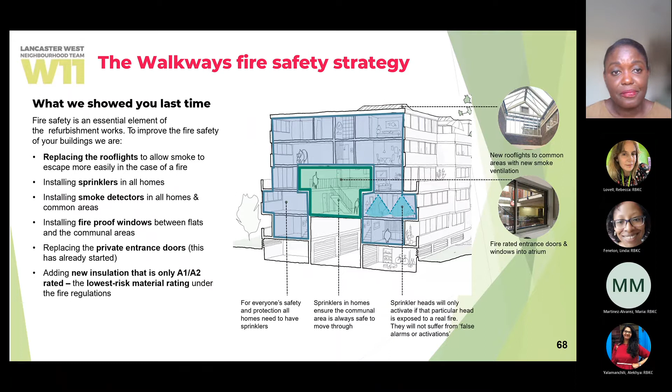As I said earlier, it's essential to install sprinklers in all homes. The sprinklers will suppress flames and the spread of smoke and fire from a flat into the communal area. This is necessary to ensure that the communal area is a safe place to escape through.

This is all incorporated in the smoke modeling we've done, also known as CFD modeling, to ensure fire safety. We've also identified the need to upgrade the fire detection system with a new electrical control system. Fire detection and alarms within all flats will be installed to category LD3, and the refurbished homes will be upgraded to LD1 systems, which includes detectors in all rooms except low-risk rooms such as bathrooms.

So new front entrance doors - we are reviewing this. We've carried out a CFD model, which is done by the fire safety consultants.

Based on the outcome of that process, we've been reviewing the potential need to relocate some front entrances in the walkways to improve safety and create additional space in people's homes. There may be an opportunity to upgrade them from the current model. We would be keen to understand your views on the approach we need to take.

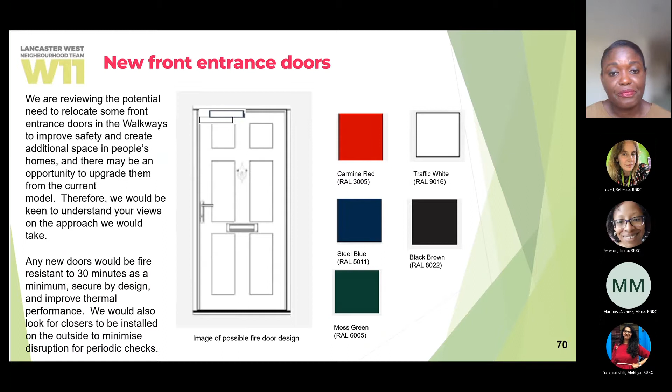This means all new kitchens and bathrooms that have the windows will have a new ventilation system. Apart from enhancing fire safety, there are other benefits to installing the new windows, including improved acoustics. It's also protecting your homes from noise from the communal spaces, and it has an improved aesthetic to the communal areas as well as your homes.

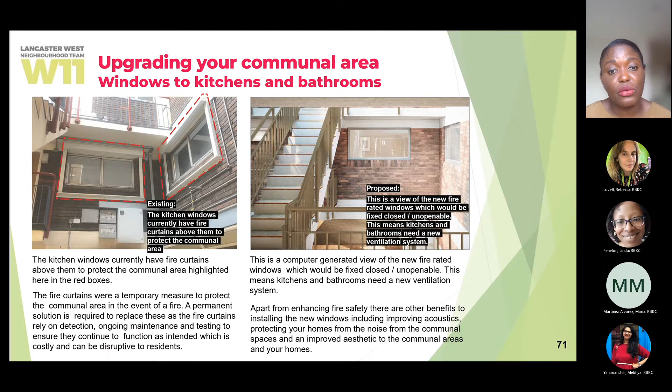As I mentioned earlier, we're going to be replacing those windows. They're now going to be fixed. A new ventilation system would need to be installed, either MVHR or MEV. I won't go into too much detail on this because I think Terry covered it so well. But the point we're trying to get across is the existing windows are going to be replaced with fixed windows, no longer openable, and hence a new ventilation system will be required.

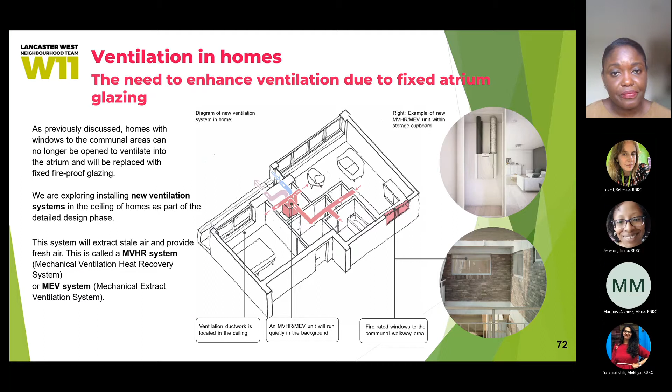There's fireproof glazing, because that's going to be fire rated now, so that contributes to compartmentalizing that communal space. I also mentioned the fireproof entrance doors to the homes, which also contributes to compartmentalizing that space. And then there's the bin chute.

It would be great to hear your feedback as part of this phase 2 process on bin chutes. The removal of the bin chutes improves fire safety, but we also know that some residents are concerned about travel distances, so I think it would be good to discuss bin chutes with residents first, and then we can make a decision on the future of refuse collection and what that means for fire safety.

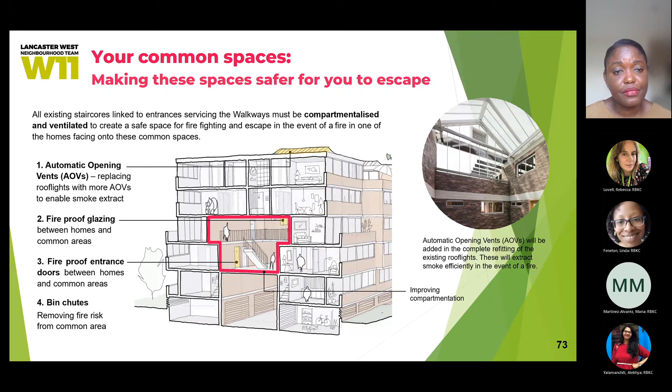In addition to the measures I mentioned earlier, to improve fire safety we would be looking at improving signage and wayfinding to ensure quick and easy navigation for both escape in the event of a fire and for the fire team when they visit the blocks. There's also reducing combustible materials to avoid spread of fire, for example new rock wool insulation. We will be looking to install A1, A2 non-combustible materials where it's practical to do so, as far as practically possible. And we're also looking at emergency lighting to ensure visibility in the event that normal lighting fails.

There's also fire detection in the communal space, which is essential. We've talked about fire detection within the flats, but also fire detection within the communal space. Next slide, please.

As I mentioned earlier, the new AOVs would provide summertime cooling as well as allow smoke to be ventilated should the AOVs be activated in the event of a fire. So within each roof light, each roof light will be openable during the summer months to help cool down the atria space. This would help combat overheating.

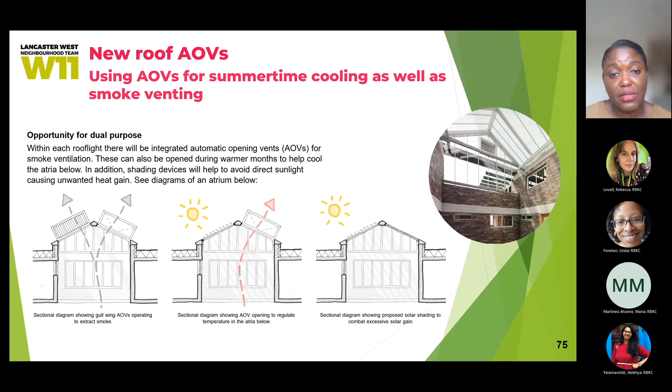Keeping the communal space empty is an essential part of the fire strategy of the three blocks. Currently bicycles, prams, and boxes are sometimes stored by residents in the communal areas. This is a fire safety issue, as the communal areas need to be empty to ensure that residents can escape safely through the space in the event of an emergency.

To address this issue, the proposed design is to provide new dedicated storage rooms at the corner entrances of Barandon and Hurstway Walk. It would be located near the entrances for convenient use, and residents will be able to store bikes, prams, and other things. We will be providing more information about this in phase 2 and phase 3 of the co-design process. Next slide, please.

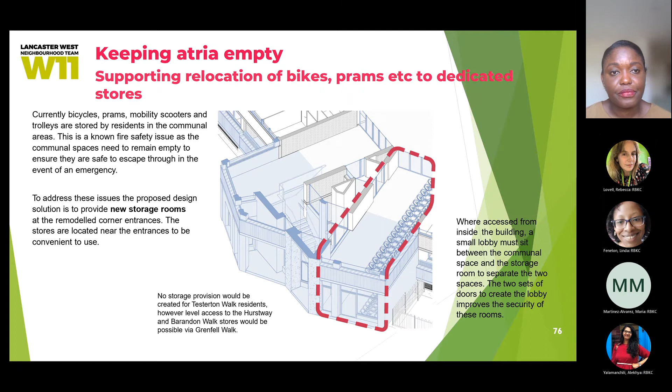As I mentioned earlier, I won't go into too much detail on this. We need to adapt the existing refuse strategy to improve fire safety.

We could upgrade the existing bin chutes and improve them, or remove the existing bin chutes, which would be great, and introduce new dedicated refuse stores.

That's the recommended option, because the fire risk presented by the presence of the refuse chutes is eliminated, and we can have new dedicated refuse stores, which addresses both the fire safety issue and the future refuse collection strategy for the walkways.

So it would be great to hear residents' thoughts on the future of the refuse strategy for the walkways. Next slide.

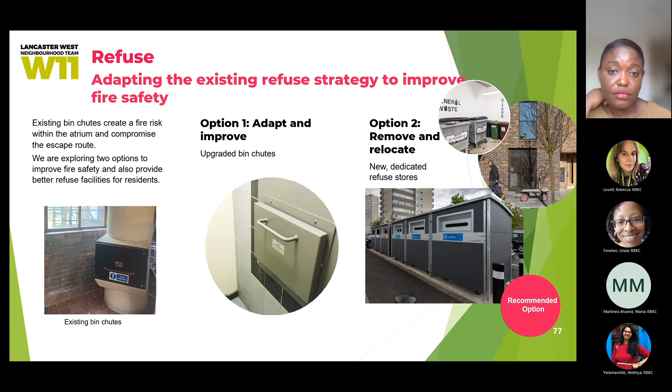We've also looked at improving access and means of firefighting - access for fire trucks, easy access to the blocks. We've talked about signage within the communal areas, which would help firefighters navigate the communal spaces and understand how the flats are configured.

But we've also looked at this externally. Designated areas for fire vehicle access are recommended at both corners of Hurstway and Barandon Walk. In addition, two vehicle bays are provided along Whitchurch Road near the ramped entrance at the southern end of the blocks. The hoarded off areas of Grenfell Walk adjacent to the service road below cannot be relied upon for access.

We've been looking at that with a fire engineer, and we'll feed back more on this in phase 3 of the co-design process. We've also looked at the distance to entrances.

We wrote to you about dry risers, upgrading the existing dry risers, and there was an engagement event held recently to update you on what's going on with that.

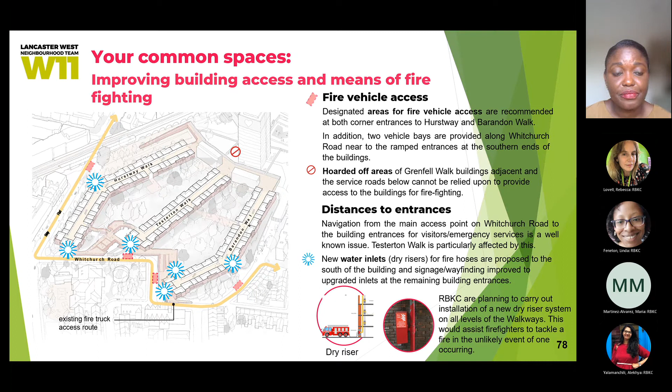We'll now hand over to Maria to talk about the survey. Thank you, Bumi. So now I will explain what you can do to let us know your choices and preferences.

We have put in place different methods to collect feedback. The first one being a paper survey. All residents will receive a copy of the survey sent by post, and you can return it to Unit 26. There is a dedicated silver survey box that you can put it into.

The second option is an online survey. If you have signed up to our e-newsletter, which covers the progress of the project and is specific by block, you will automatically receive an online survey. But you can also scan any of the QR codes presented throughout the presentation, and you will get the link direct to the survey.

We will also publish these in booklets, posters, and letters. So please let us know if you haven't received any.

And finally, we can text or send a WhatsApp message to you if you just contact the number shown on the slide: 07814608999, and we will send you the link.

We are happy to provide guidance and support if you have any further queries. Please remember the deadline for the survey is midnight Sunday, 20th of November.

And please, if you would like to see any of the samples that we have presented throughout the presentation, come to Baseline. There's a specific showroom in Unit 29 that will show all the things we have discussed so far.